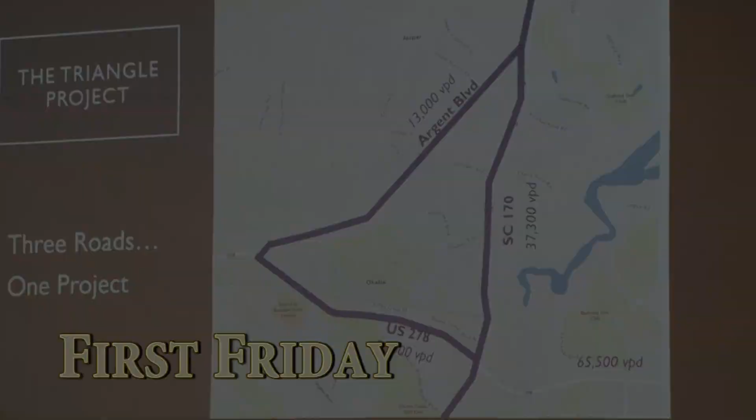Tell me where the Triangle is located. Well, it's right here around you. So the triangle is just a simple word for the three roads that make up SC 170, 278, and Argent Boulevard. They form a triangle, so we named it the Triangle. Okay, sounds pretty simple to me and something people can relate to, the Triangle.

Now, what are your short-term fixes for this area? So we know that safety and capacity are both issues on all three of these roads. Initially, we're starting out with work on SC 170. We've actually got some of that work starting right now, and we're working on specific intersections and improvements, basically from 462 all the way down to 278. Some of the main improvements being at 278 and 170 at the interchange there, making better flow in and around that interchange. So you'll start seeing those in the near future.

Jared Fralix, he is the Assistant County Administrator, Infrastructure. Jared is all over. I mean, if you're in the government or if you're doing something, Jared is always talking. He's a great speaker, and I think you'll enjoy it.

Thank you. Yeah, when Councilman Kemp asked me to speak, he said it'd be about 40 people. And then I don't know the number, but it's closer to 400 than 40. So, hey, thank you for coming. Appreciate the opportunity to come talk to you guys about the Triangle and traffic.

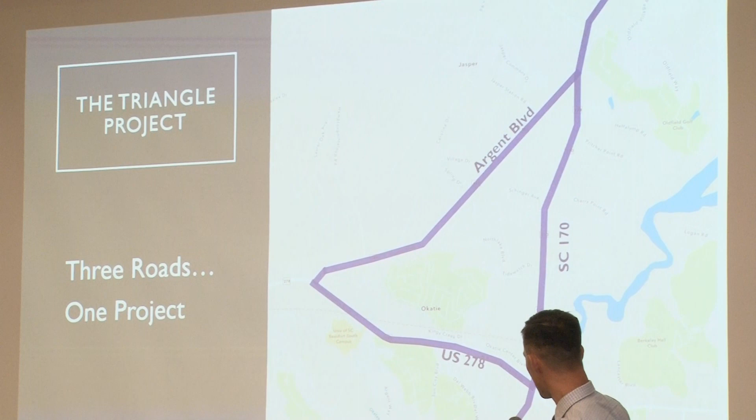So the Triangle Project, what is it specifically? So we started on SC 170, and if you go all the way to the top, that's at 462 when you go towards the interstate there, and just down past 278 to, it's not Del Webb, but right here at Okatie Center South where the Food Lion entrance is. So that's what we started with.

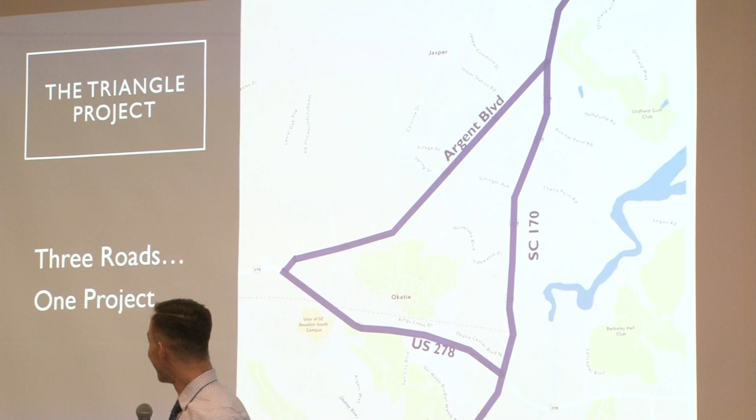We're doing all this work because we know that 170 needs improvements, but we hear a lot about Argent Boulevard, we hear a lot about 278. If you're going to do a project, the project is the same whether you've got a $10 million project or a $100 million project. So why don't we look at this all together rather than do one project, wait a couple of years, do another project, wait another couple of years, do another project. So why don't we put it all together? We said, okay, let's look at the three roads. So 170, then 278 back to Argent Boulevard, and then Argent Boulevard from 278 to 170. Us creative engineers said, man, that kind of looks like a triangle. So hence the name, the Triangle Project.

And I got asked just beforehand from Miss Martha, where exactly is the triangle? You guys are in the very center of this triangle, so y'all are hitting all these roads on a daily basis, I'm sure. So again, my goal is to inform you guys and let you know we are working on this.

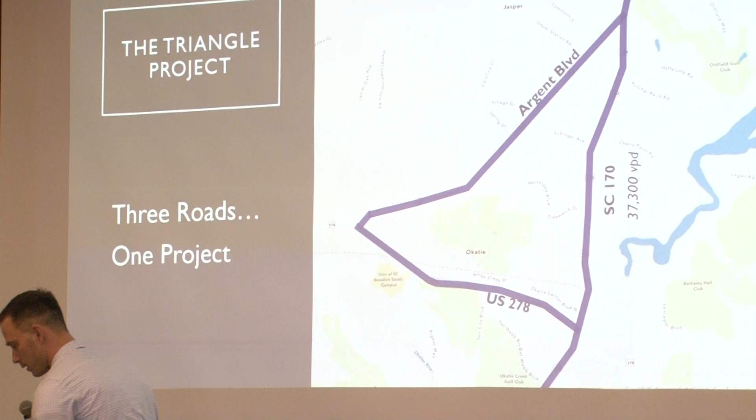Real quick, if you've heard this before, I know Ms. Tabb and Chairman Passiment, you're not allowed to answer. But a two-lane road carries, does anybody have any clue how many cars a two-lane road carries, just rough numbers, per day? The maximum. 30,000? 60,000?

That's right, 20,000. So if you look at a 2-lane road, that's 20,000 cars. This is just high level, just so you can get a feeling for it. So a 4-lane road, by that math, would hold 40,000, and a 6-lane road would hold 60,000.

On 170, we are at 37,000 VPD, vehicles per day. So we are very near 40,000. That leads you to believe, just rough numbers, that once you get to that point, if it's a 4-lane road, it's close to its max capacity. So it makes sense why we're having capacity issues—it's carrying the volume that a 4-lane road can carry.

Similarly, on Argent Boulevard, it's a 2-lane road at 13,000, and 20,000 is capacity for a 2-lane road. So it's not at capacity, but there are pinch points along the way, plus growth and construction, and we'll get to that. Lastly, on 278, it's about 34,000, so it's not quite there, but it's getting close.

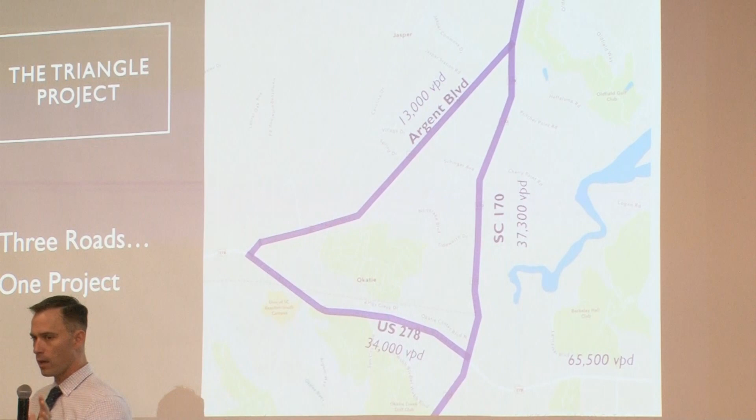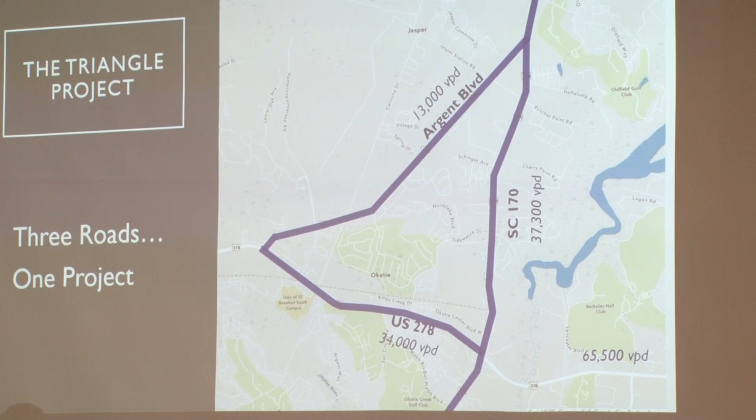So when these two roads meet, this is the highest traffic point, 65,000 vehicles per day, in the entire Jasper-Beaufort County area. That makes sense because you've got 34,000 and 37,000 colliding, most of them coming around this circle and headed easterly towards Hilton Head. That lane is already 6 lanes, but with 65,000 vehicles, that section—if you've driven it—there's some traffic, and then once you get through it, it starts getting a little better.

So what have we done so far? This is not something new—we actually started and completed a traffic study on 170 in 2017, from basically 278 up to 462, and completed that study in 2019.

This was done through our regional planning group called LATS, Low Country Area Transportation Study. That's not just a Beaufort County or Jasper County or Hardeeville effort—that's everybody working together. This study was commissioned by LATS in 2017, and it gave improvements for what needs to happen on 170.

Concurrently, or shortly thereafter, Hardeeville commissioned a study on Argent Boulevard, from the limits of 278 to 170. Same thing—it gave recommendations, one of which was widening and some intersection improvements. And then lastly, we said, if we're going to talk about this triangle, let's do a study on the last segment, 278.

So all these studies, when you're looking at an infrastructure project, you've got to have a beginning, a ground point, a conceptual plan—and this is that. All this work is in motion, which is very slow work. We've still got cars getting into accidents every day, but this is the foundation. Every house has a foundation. This is the foundation of improvements to what we're planning on bringing to the area.

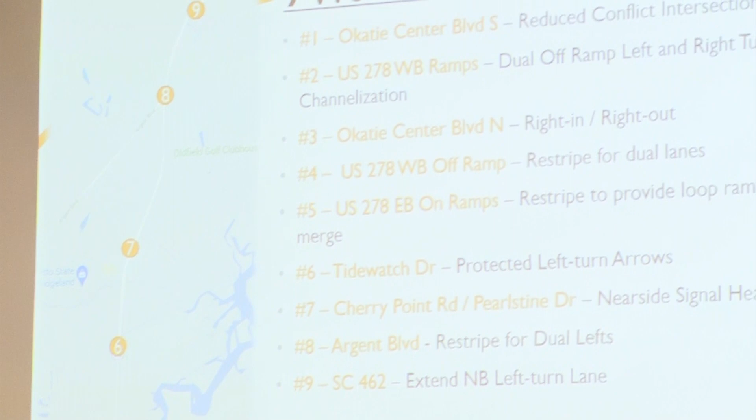I'm sorry if anybody was there, maybe 4 or 5 months ago, I gave a similar presentation to the Southern Sun City.

Do you guys have a name for that? This is Northern—this is North?

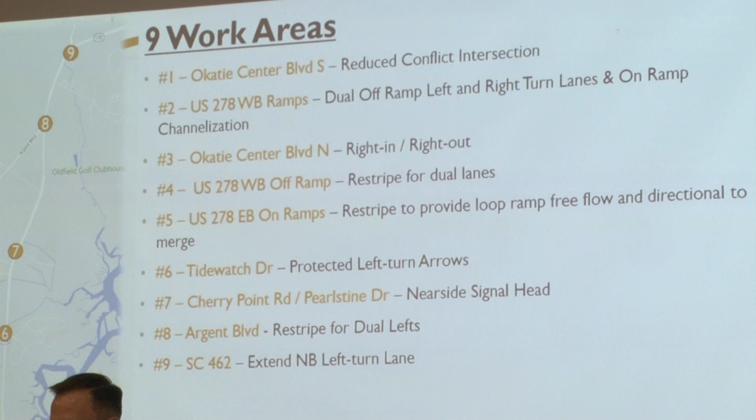Okay, so y'all use the indicator north and south. I didn't know if y'all had it. Y'all need to come up with a better nickname than just north and south.

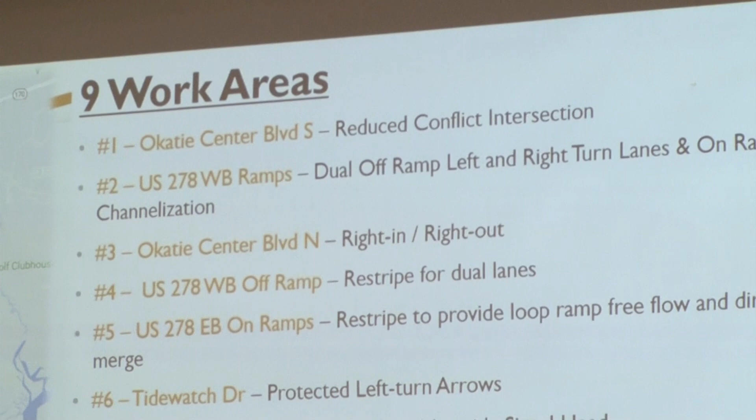So anyhow, a lot of the same presentation that I gave a couple months ago to Sun City South, but a few more updates along the way.

The good thing is these are the problem areas that were identified in the report, and you can see the different numbers here in an illustration, and I'll go through them shortly.

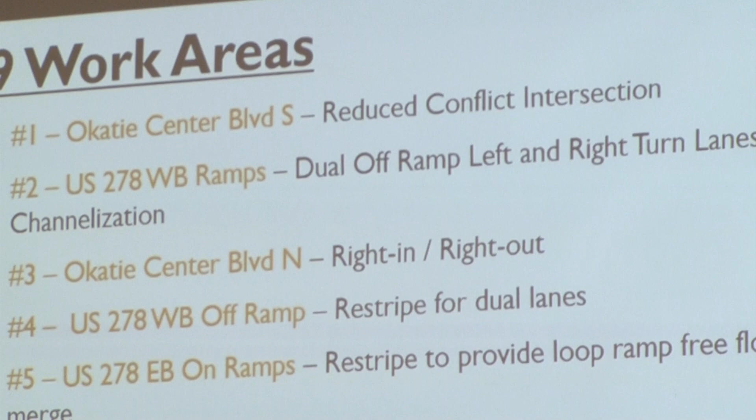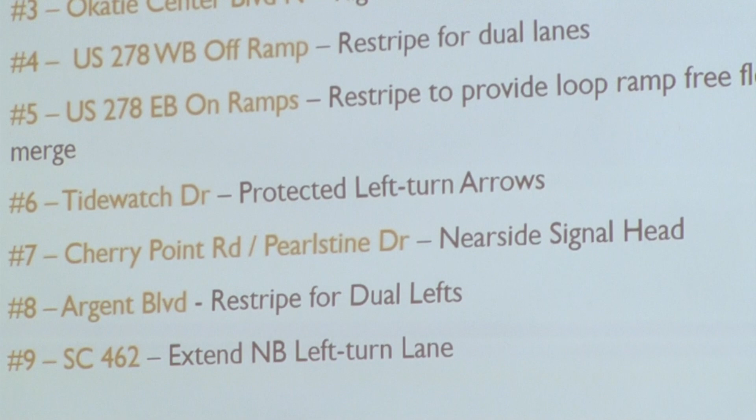About 2 years ago, we said let's get started with the short-term projects. We went into design, through the permitting process, and during this past summer we went through construction. The interesting thing is, and this doesn't happen very often, DOT had a planned project in the area to do some resurfacing, basically from on top of the bridge to the first bridge at Okatie River, since some of the asphalt's getting old and raveling.

They said we're going to do that project, but in 2 years. We said it wouldn't be great if we did our project and then you come back later - can we just put it together? That was not an easy conversation with DOT, as you could imagine, especially trying to get them to spend their money faster versus 2 years away. But finally they did agree to it.

So not only are we going to do the projects we've specified, which I'll talk about in just a second, but we're also going to incorporate DOT's paving that they were going to do. That made it a bigger project, so we got some economies of scale working for us when we went out to bid.

So what are those specific intersections? Starting on the south, we'll work our way up. This is at Okatie Center South, so the food line is to the north off the page. We hear a lot of times about getting out at this exit. Well, part of the study did a traffic analysis.

In order to put a signal at an intersection, it has to meet so many warrants. That's not a county thing, that's not a DOT thing, that's a national federal standard. It's usually dictated by the side road - not how many cars are going down the main road, but how many cars are turning onto the side road or trying to turn off of the side road onto the main road. That's what typically triggers a signal.

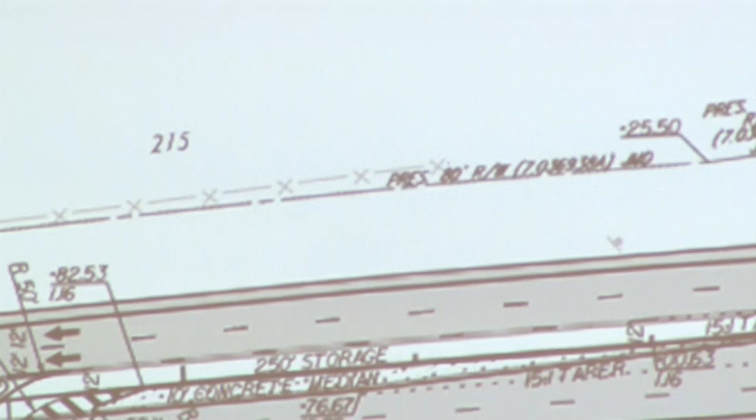This is a little hard to see, and I'll try to describe it. The Food Lion is right there, and what's planned here is for you to take that turn. If you're sitting in traffic today and you can't get out, you're already making that right turn movement, so this is just reinforcing that movement and giving the opportunity for somebody to make a safe U-turn at that section.

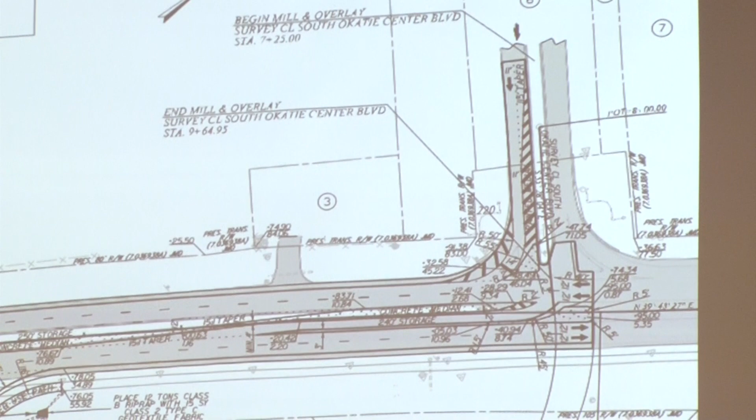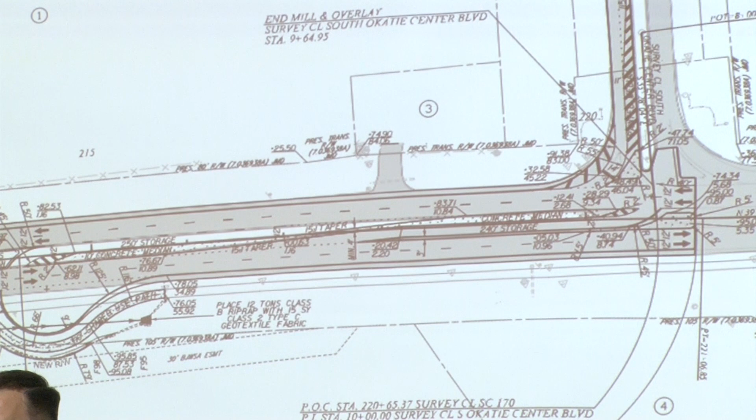We do allow for you to turn into the Food Lion road, but not out of it. So if you're coming out, you will only have a right-in and right-out option. But we're making a safe opportunity for somebody to do a U-turn and then go back the opposite direction.

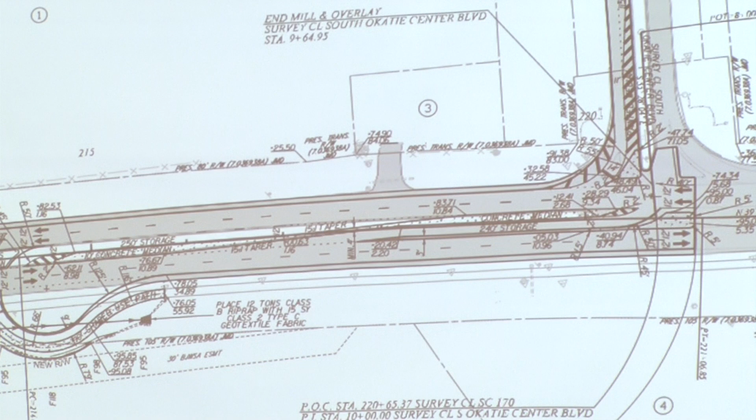So this is as much as we can get approved without meeting the warrant for a signal. If more development happens specifically on the southern side and it comes to that intersection, that can be reevaluated, but it's just not today. So this is as much improvement as we can squeak out with DOT's blessing in the current situation we have in front of us. It may be different, but that's what we're aiming for, and hopefully that'll help some of the traffic trying to get out.

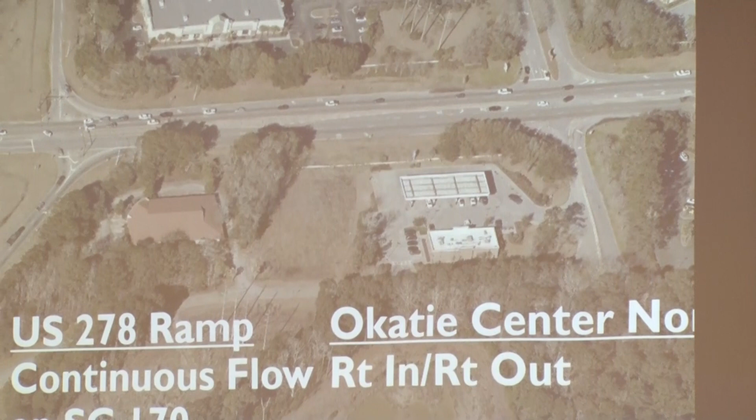So 278, this is 170 across the board, 278 towards I-95 to the top, and Hilton Head down to the south. Right here currently we have a signal, a right turn with an acceleration lane, and a single left turn.

I don't typically come this way a lot as far as getting off this and turning left, but even today as I was coming here, there was a heavy backup of folks trying to turn left. So the short-term idea is what can we do with existing pavement, because if we're adding lanes and adding pavement, it gets really expensive.

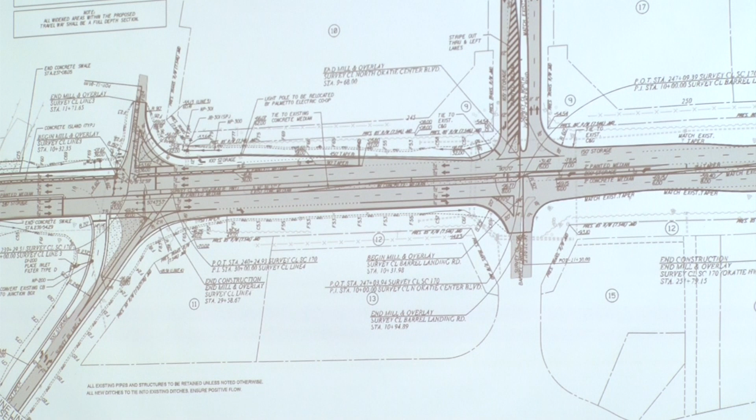We got $3 million, how much can we get done? So what we're doing is reorienting the signal a little, and we're going to keep the right turn lane with a free flow condition, then add a second lane. So you're going to have two lefts out of this intersection getting onto 170. We're also making a concrete median there, separating that traffic because we don't want it directly across to the on-ramp.

The reason is this is the biggest improvement we're going to see in the area. Currently, the way this operates, let me go back, you can see people stacking right there, and you get a green light, and it's who's got the bigger engine and presses the pedal the fastest to get to the loop to get on the bridge.

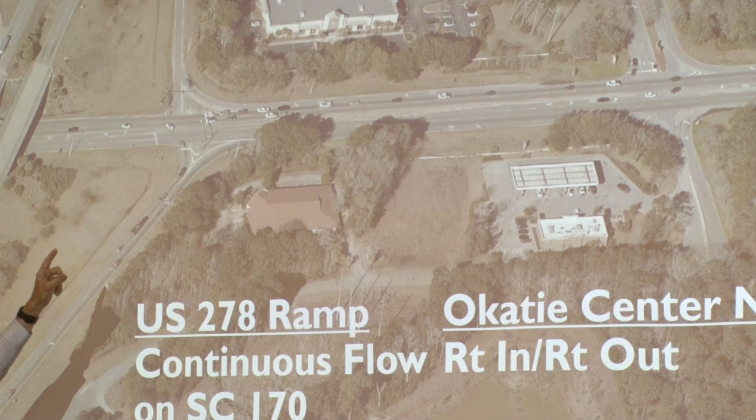So we see a lot of people stacking up in that outside lane, and then if you're a savvy driver and a race car driver, you get in the fast lane and punch it as soon as it's green so you can get over there.

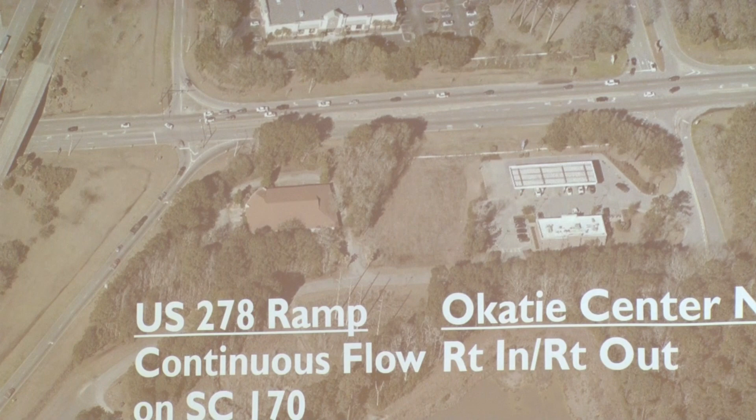What we recognized when we did the traffic study is that right turn to go north or westbound isn't really that utilized. Rarely do you see a line of cars trying to turn right. So what we're doing in this improvement at this location is we're going to start the turn lane to get onto the traffic circle right at the existing point.

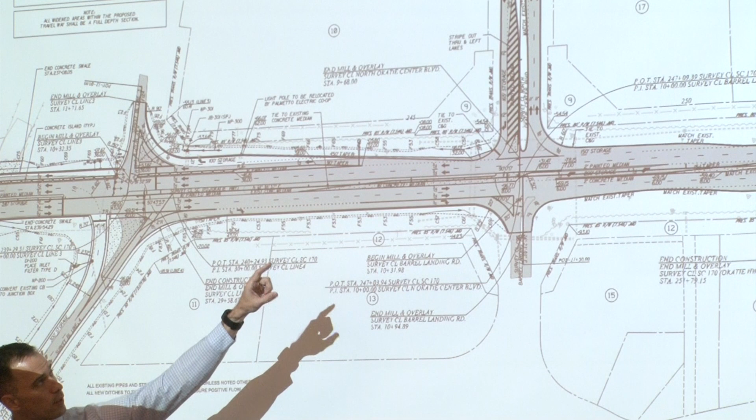So when you're coming out of Okatie Center North, this is a divided free flow lane. The only time that lane is ever going to stop is when there is a car that wants to turn left and head west on 278. Otherwise, that lane at the very top is going to be free flow. There will be a divided, concrete divided median between that lane and the two through lanes to create that free flow situation.

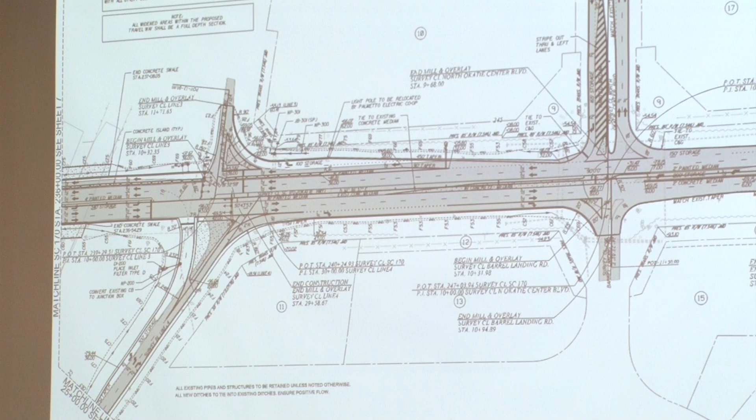Any questions on that? If I'm not explaining it well, it's kind of hard to see on these engineer plans. Yeah, I'm sorry, I don't have a pointer either.

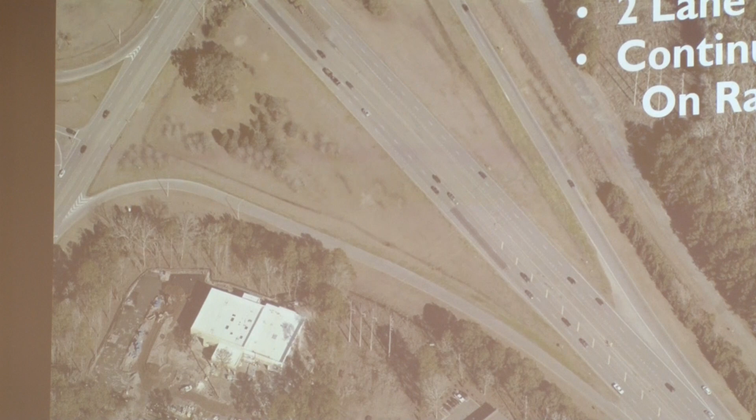So on 278, let's see, hold on, all right, let me get to the slide here. All right, this is a better picture of it. So this is the movement that we're going to free up. We're going to extend this turn lane through the intersection all the way to the intersection at the very north. All that's going to be storage capacity for people trying to get on 278.

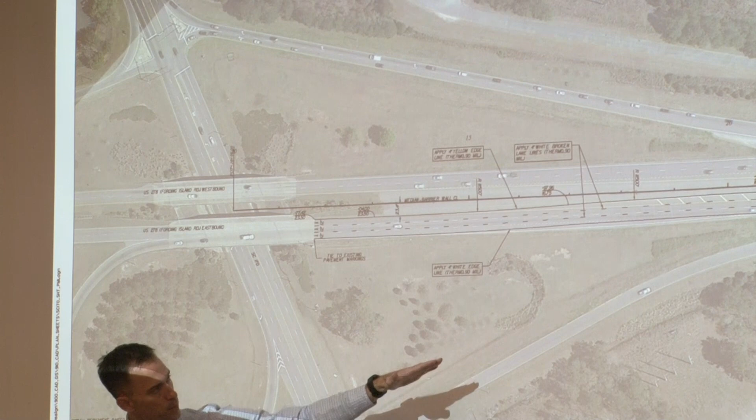But what we have at the top, you've got this clover leaf, and then we've got two lanes going 65 miles an hour and one lane going 25 miles an hour trying to catch up and merge in. Also, what we have currently is this lane comes, and this lane eventually has its own lane. It never has to merge into the two lanes of traffic. It has a free flow at the end of that.

So we're going to switch it. We're going to give the third lane at this point, so this car does not have to merge onto 278. They come up the traffic circle and they have it. And then this on-ramp merges into the already three lanes. Does that make sense?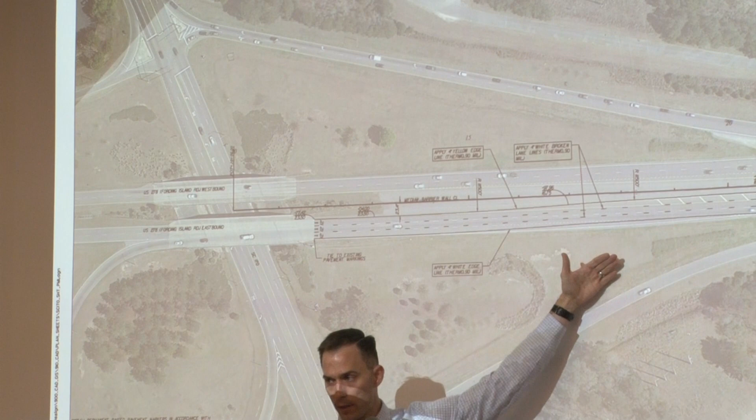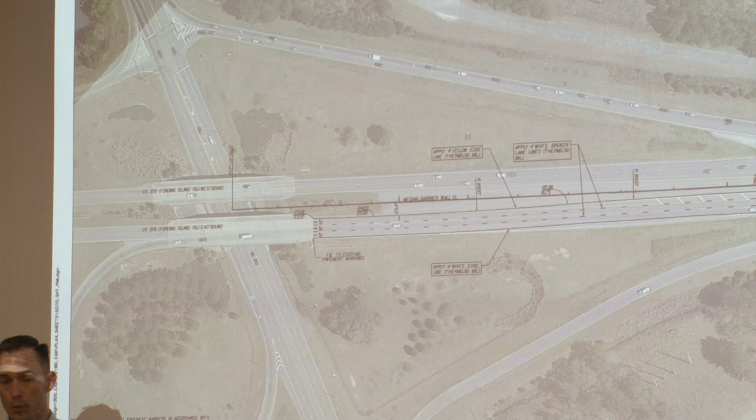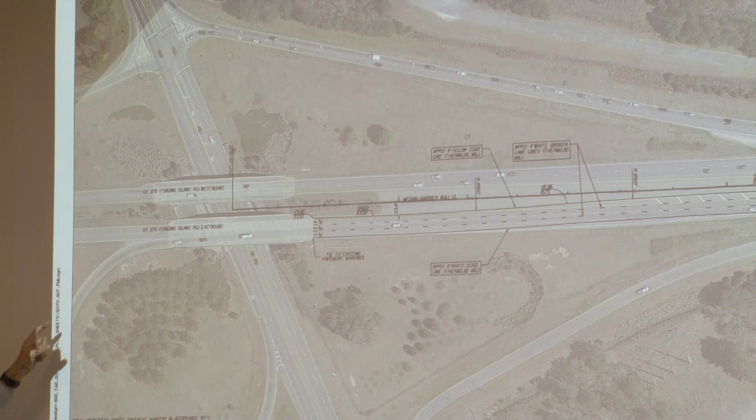So not a lot of work to do there because there's already asphalt right here. DOT was simply going to resurface this and the ramps as part of their project, and we said, well, let us do it and we'll restripe it as part of the resurfacing project. So not only will it be brand new asphalt, but this will have a full turn lane or a full travel lane so that merge won't have to take place anymore at the top of the bridge.

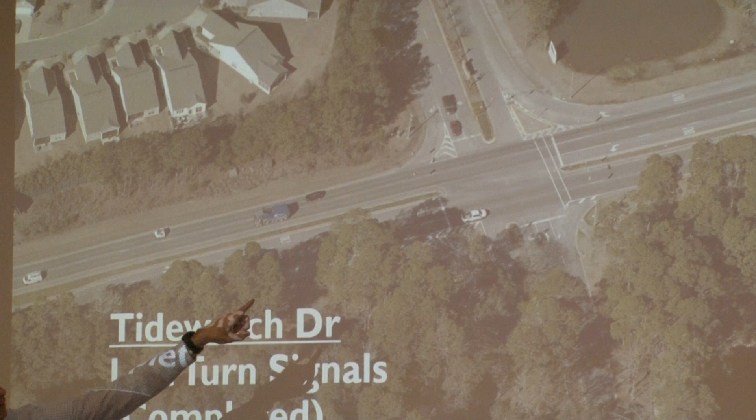All right, at Tidewatch, and Chairman Passiment's in the room, so just to orient, this is Tidewatch signal back on 170. This is Riverbend here, and then Sun City North.

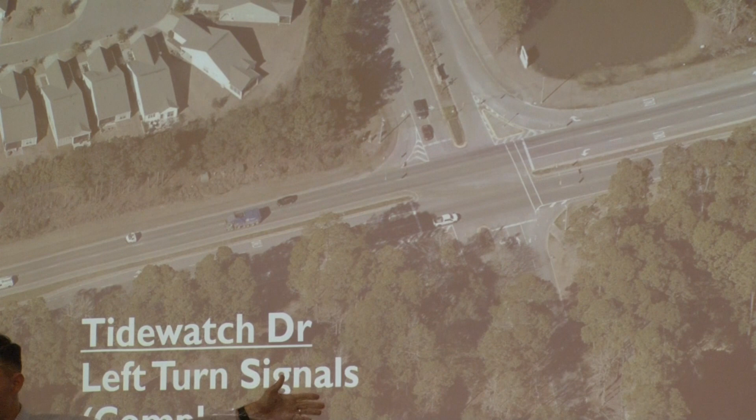Y'all still need a better name than just North. Does Riverbend have a name? Y'all don't have a nickname for Riverbend? All right, next time I come back, I want to hear new names for each of these three. What about Sun City that's going across Argent? Y'all got a name for them? I thought engineers were not creative. Y'all are less creative than we are.

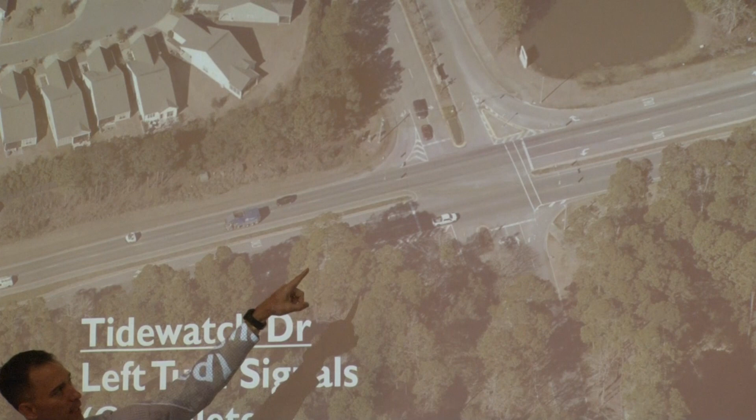All right, so at Tidewatch, not a lot here. The improvement was a left turn signal. We have left turn lanes, and a lot of times when cars were stacked, if you were trying to turn left and a car was sitting in the turn lane, you couldn't see past that car. So we've added a protected left turn, a green arrow so you can make that left movement into Sun City or that left movement into Riverbend. So that was a small, quick, easy project.

As easy as it was, you can ask Chairman Passiment, we had to go all the way to the very top of DOT to get that installed. So seems like the easy things are just as hard as the hard things.

So what we're going to do, and sorry the angle keeps changing, we're going to restripe that as 2 left turn lanes, and that lane that was the right turn previously will be a left or a right. So this will be restriped as 2 lanes to turn left, and then this one you can still turn right out of, but it'll have the opportunity. The signals will get changed to allow for that timing, so there should be a lot more capacity for that movement that backs up past Shortcut right now.

So none of these are really out of the box. Yes, sir.

That's right. So that person is trying to turn right, they will have to wait in that left turn traffic. Long term, we're definitely going to work on that, but short term, with limited funding, we're working on the biggest movement. But you're all right.

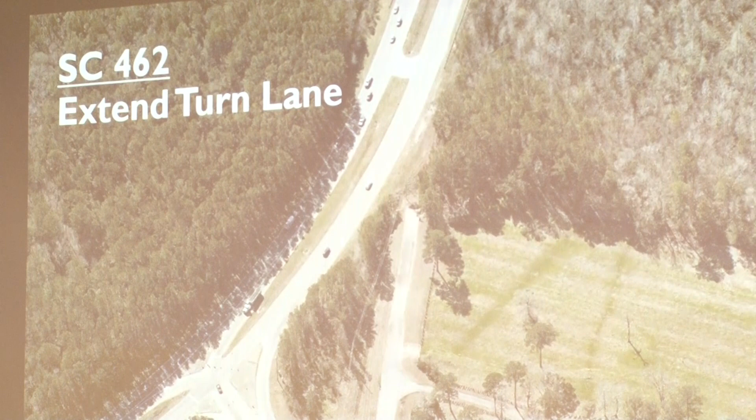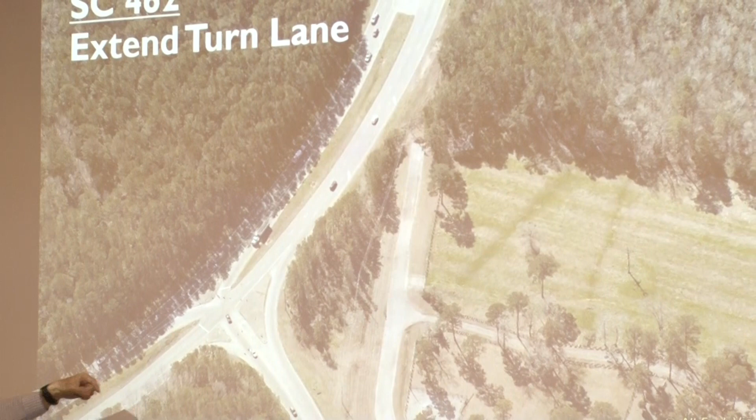All right, so this is 462. I'm totally backwards now - this is Beaufort, and this is Okatie going that way. What we have here is a heavy left coming into Argent. This is also the first signal you get when you're coming from Beaufort down to the south, so you're seeing a lot of the 40,000 cars that come to a signal. That's the reason you see that backup.

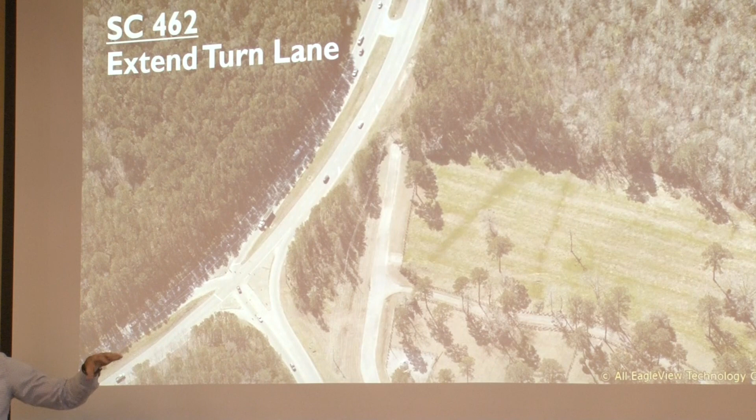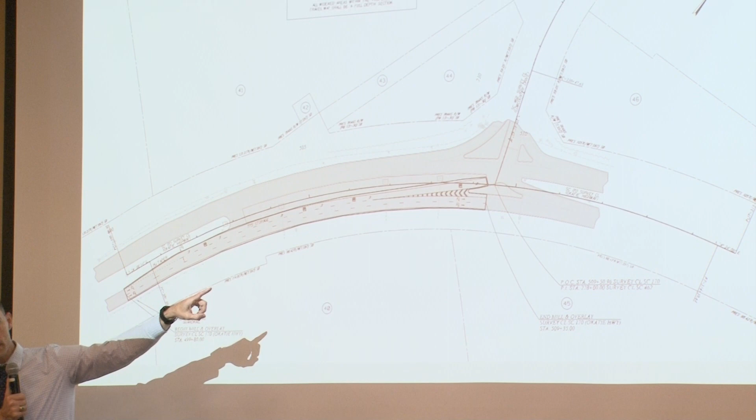What we're working on is there's so much demand for that left turn that it backs into the fast lane, and we start to see accidents there, and then obviously accidents here. This is relatively minor - if you drive this way we actually have black asphalt out there now, which is really nice. Most times when I talk about something it's a year away, but this is stuff that's actually happening now. We're extending this storage lane all the way back as far as we can, and then we'll be retiming the signal to allow that left turn to flush through and make improvements there.

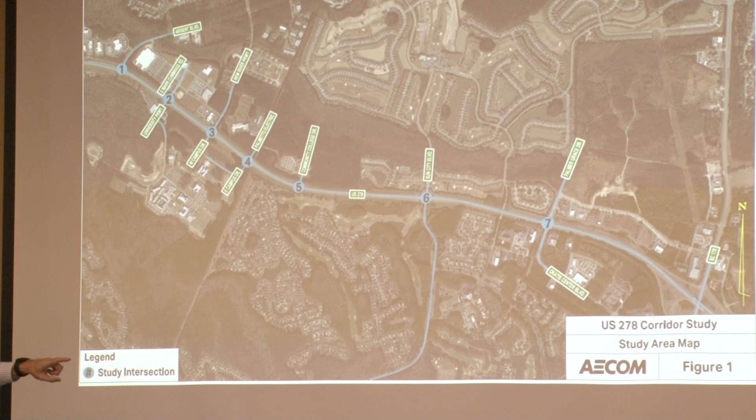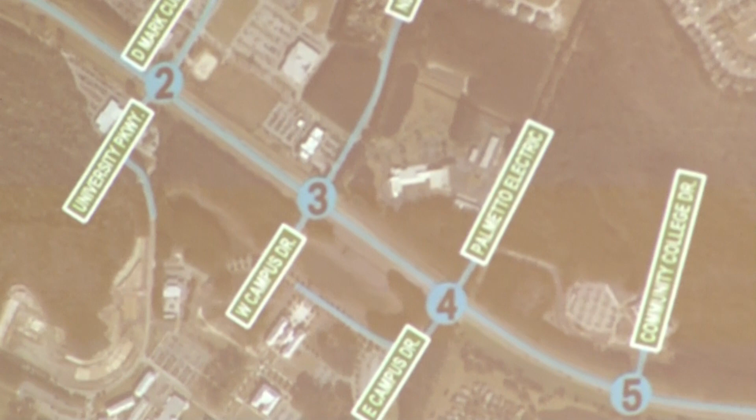All right, so 278 - what's cooking on 278 per the study? To the north is Argent Boulevard, and to the very edge of the page is the interchange. At some point the interchange will need major improvements, but that's not happening at this very second. We're going to get to that - it's not in the near-term projects beyond what I just described, but in the long-term projects there will also be some interchange improvements.

So the major things going on that the report said is New River Parkway has a lot of cut-through traffic, and that cut-through traffic is going to continue and grow. Currently that's a private road, so there's not a lot we can do with local government and public funds until the opportunity arises, maybe that it does become a public road at some point.

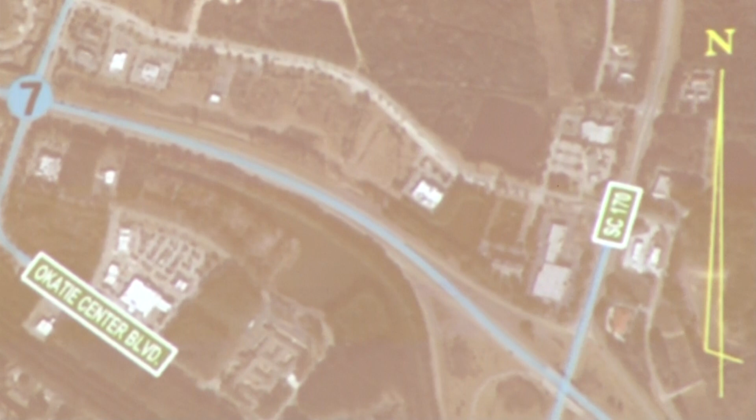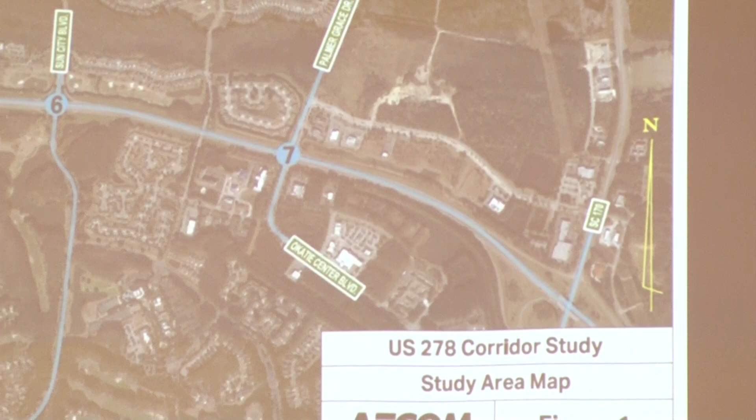But what the traffic study said is it would make a lot more sense for that to be the signalized entry onto 278. So if you live up in Riverton Point or up in East Argent, you could come all the way out to 278, come across Argent and come there, and then you have a signal to make a left turn onto 278.

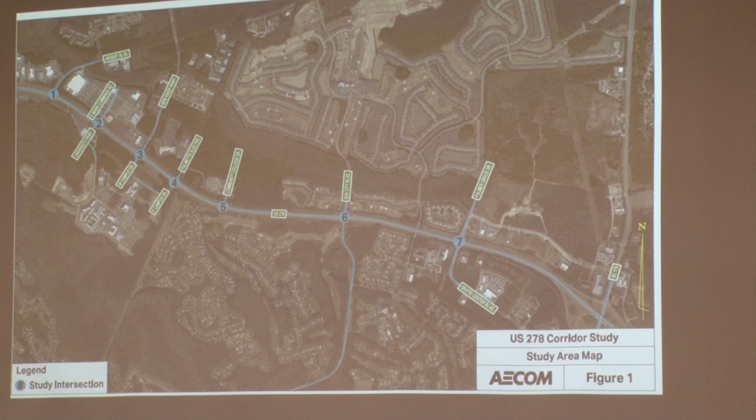But if we put a signal there at number 3, then the existing signal currently at Walmart at number 2 would be too close to one another. Again, this is 55 or 60 miles an hour coming into this section, so we have to have at least a half-mile space between signals on a road that size. So what this plan is saying is, let's take the signal at number 2 and move it up to Argent at number 1, and then install a new signal at number 3.

So if you're coming on Argent right now and trying to either come on 278 and turn, it's not so bad with the right turn headed out of town, but if you're trying to turn left back into town, it's complicated. So those are the highlights on 278.

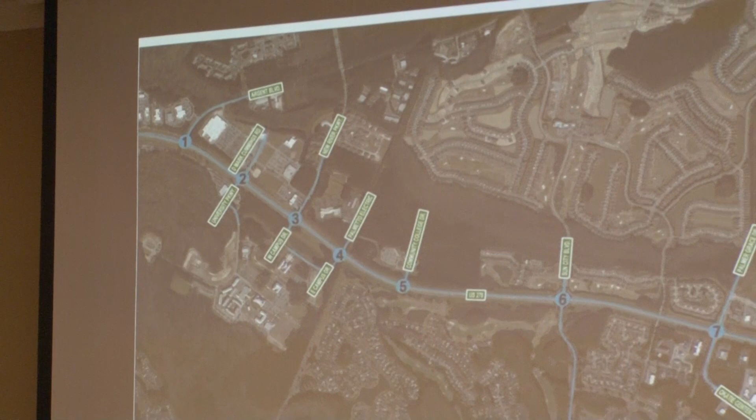The other thing - I think the transportation subcommittee of the POA for Sun City reached out and asked about number 6, the main entrance at Sun City Boulevard. There's left turns on 278 turning into the neighborhood on both sides, but not coming out of the neighborhood. So we have a study going right now to see - not only does a warrant have to be met for the entire signal, but if you add a phase, every phase you add specifically to the side street takes away time from the main street.

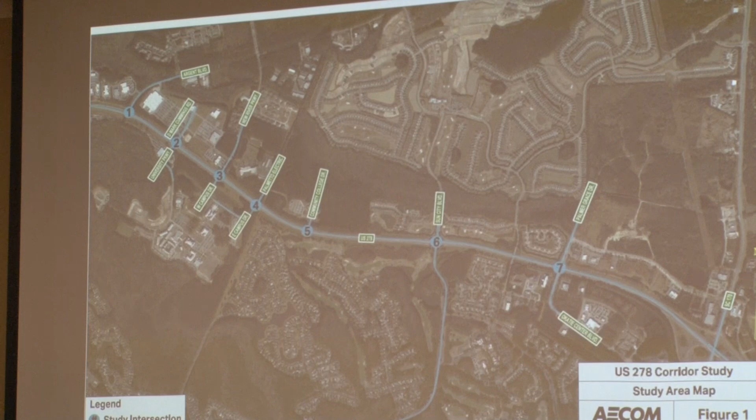So it introduces delay, and it's a bit of a balance on how much time you allow to the side street versus how much delay you introduce to the main street. But we're looking at that - it's under design right now, and we've got traffic counts and engineers looking at it.

Yes sir, west of number 1 there's a lot of backup that comes into the slow lane. Is there anything that can be done about the approach lane to that new traffic lane? Not currently - that would be longer term. I'll talk about what we're doing with some signals, including this one, in a bit, but yes, that turn lane really could be lengthened so it doesn't spill out into the 278 main.

That's right, we'll get to that, but it probably won't be in the near short term. That would be part of the bigger project. But it's a very good comment.

The question was, when you're coming eastbound on 278 and turning left onto Argent, that left turn often has a heavy movement and spills back into 278. Are there any improvements planned there? The answer is yes, but not in the short term. We'll look at extending that turn lane a bit later, and I'll come back to that intersection as far as what we're looking at. So that's 278.

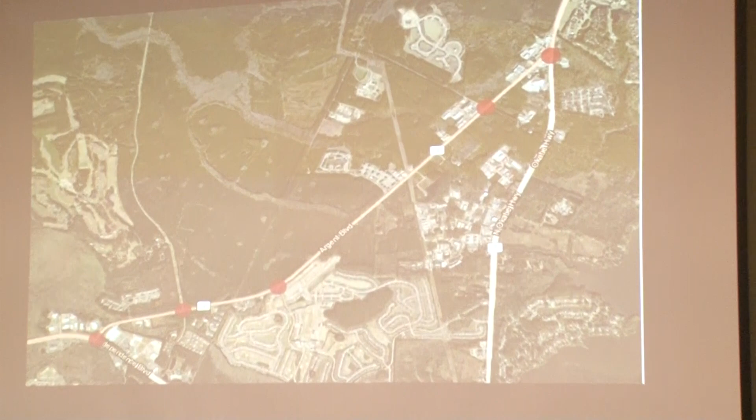This is a little hard to read, but the red dots represent the proposed signal locations from that study that Hardeeville did. So 278 and Argent, which we just mentioned, New River Parkway, and then in Sun City, that's Sergeant Jasper - y'all need to come up with a better name for these. And then up here is Shortcut, and Argent Boulevard and 170.

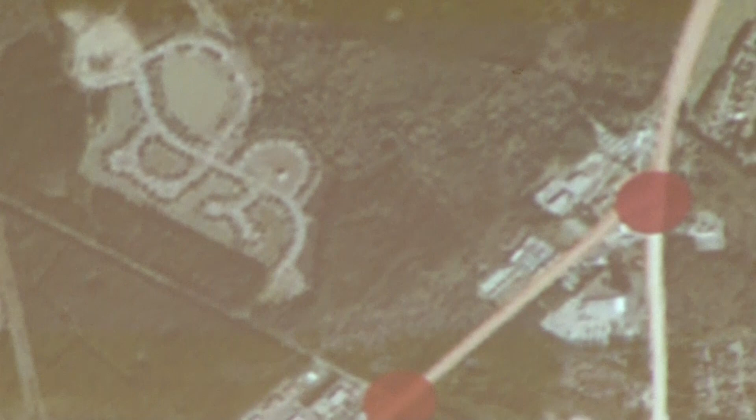So this gets into exactly what your question is. Not included on this map, we've got several signals that are in some sort of progress, and I'll try to describe that. In addition to these signal locations, we're also looking at 170 and 462.

The county has purchased property on that curve on the east side for a future law enforcement center - formerly known as the cooler tract, about 100 acres. So when you're at the signal and look immediately to the right, that's county-owned property for the future law enforcement center. As we looked at 170, we realized if there's an opportunity to realign that intersection - which is just off the page here, in the middle of a curve - that's the worst thing from a planning and engineering perspective for an intersection. So we're going to look at relocating the existing signal at 462.

We need to get a fancier ringtone, something with some jazz to it. If it's going to ring, at least let it have a good song.

So on 170, we're going to look at relocating the 462 signal between John Paul and the ACE school, which would align with future plans for the law enforcement center on the opposite side. That way multiple users have safe access to a signal in a straight section rather than a curved one.

That's one. The second, also just off the map, is at Oldfield and East Argent. There's a lot of construction on East Argent. Oldfield - if you ever go visit friends there, it's very challenging to get out of their driveway - so we're looking at signal improvements there. We already talked about Argent, so we're doing near-term improvements, but also long-term improvements when we widen Argent to four lanes.

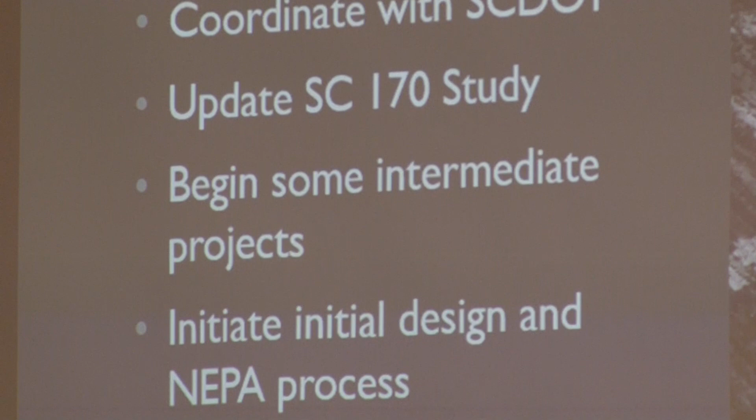So once it gets less than 45 degrees at nighttime, the asphalt season's pretty much done until you get past that. So they're going to try to finish the work at Argent Boulevard, 170, and 462 over the next month and have that finished. You'll see a pause, not a lot of activity going on, and then come March, they're going to come back and start at the 278 interchange. Not sure what piece - whether they're going to be on 278 proper or on the 170 component - but that's when you're going to start to see major improvements on 170.

The fourth bullet here: initiate initial design and NEPA process. NEPA process is an environmental review. If you have federal funds in your project, you've got to follow the federal guidelines of the National Environmental Policy Act - I think that's the acronym. Anyways, this is what you see on 278. 278's been going through this for a long time. It's a long process.

The good thing is we're not crossing any marsh or any bodies of water, and hopefully everybody in this room and every other room that we talk to is for the project. That's not always the case when we're talking to other folks throughout the county, specifically on 278.

So in order to do that, we had a great meeting with DOT about 3 weeks ago, and we were telling them, look, beyond 278 and the 2018 sales tax projects from Lady's Island and the pathways, our most prioritized project in the entire region is the Triangle. In addition to that, what's come up even more recently as maybe a second priority, or maybe even 1A and 1B, is the continuation of widening 278 all the way to the interstate.

So DOT is currently working on the interstate widening projects. Hopefully at the end of next year, they'll have the first section out from 0 to 8 to go from 4 lanes to 6 lanes. That is intended to go out to construction at the end of next year, and they're already working on design and permitting on the second section from 8 to 21, and from there they're going from 21 to 33.